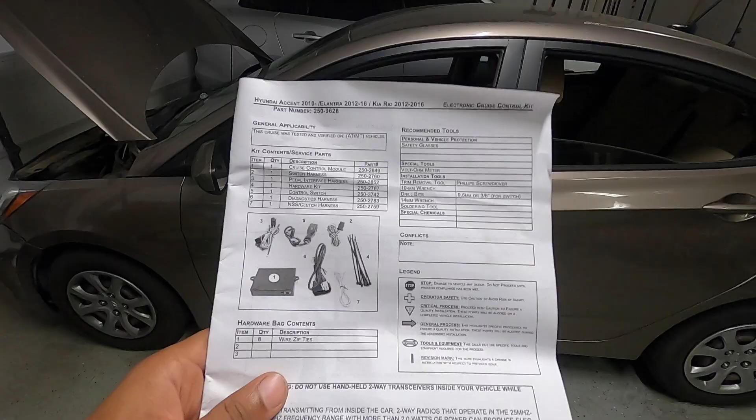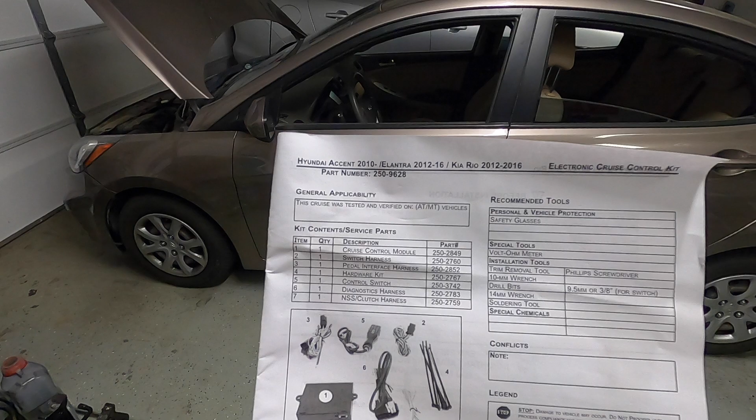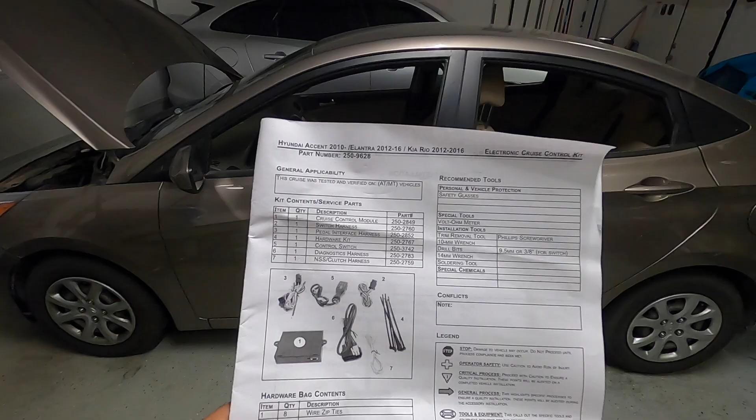So what we ended up picking up is the Rostra electronic cruise control kit. They have specific modules or kits for different vehicles that don't come with cruise control, and this is the one specifically for us. I'll put the link down below so you guys can see what it is and where I got it from, but you can pretty much get it from almost anywhere. The part number is 2509628, and that's for Hyundai Accents 2010 and newer, Hyundai Elantras from 2012 to 2016, and Kia Rios 2012 to 2016. So this is what we're going to be using today to get this thing going.

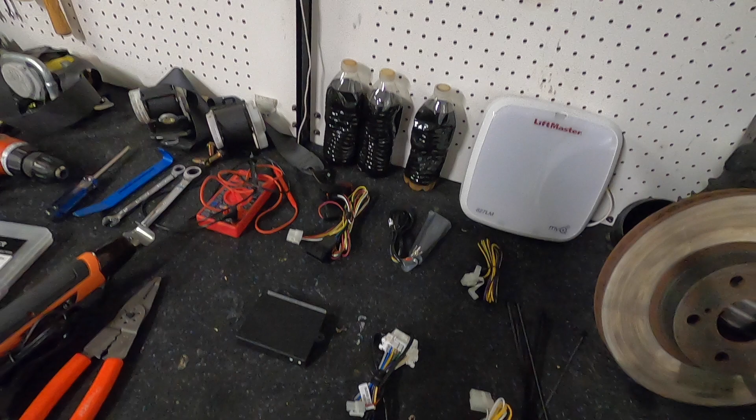First things first, guys, what you want to do before you get started is take out your kit, which is all this stuff here on the right side of the workbench, and make sure you have all the parts necessary to complete the install. You'd just hate to get the project going, midway through or almost all the way through, and find out you don't have everything you need. Ask me how I know, it's horrible.

We're going to go through this manual here today and just make sure we got everything. First, we need the cruise control module, which is this guy right here. Next up we have a switch harness, which is this one up here at the top, then followed by the pedal harness, which is this one at the far top left. Then we've got the control switch, which is right here in the middle, which is what you'll actually use to turn it off and on. Then there's the diagnostics harness, which is this guy here, and last but not least, the clutch harness, which is that one there, but we won't need that because we are automatic. In addition to the kit parts, it also has a list of recommended tools.

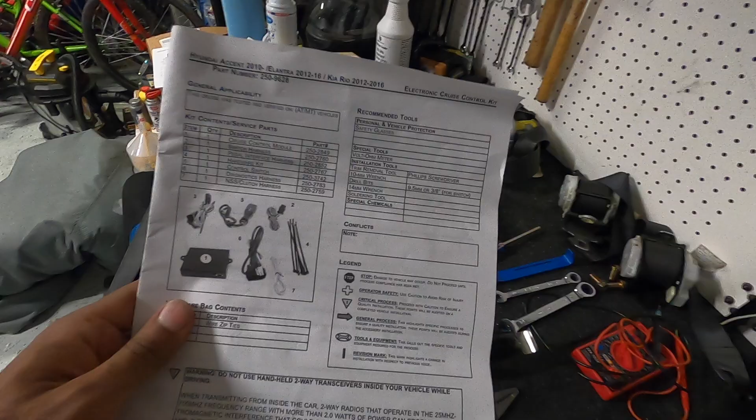I'll just run through that to give you an idea of what you'll be needing today. It recommends a voltmeter, or essentially a multimeter, a trim removal tool, which is right there, a 10mm wrench, a 14mm wrench, some drill bits, specifically a 3/8 or 9.5mm, and then some soldering tools. I decided not to actually solder this with conventional solder. What I have here is a little heat gun - I'll probably do another video on this, just a review of how it works, but it's amazing. This guy pairs hand in hand with these little solder splice connectors, which make it real simple to do actual wire soldering. You'll see this in a later video, or a sooner video, depending on what order I post.

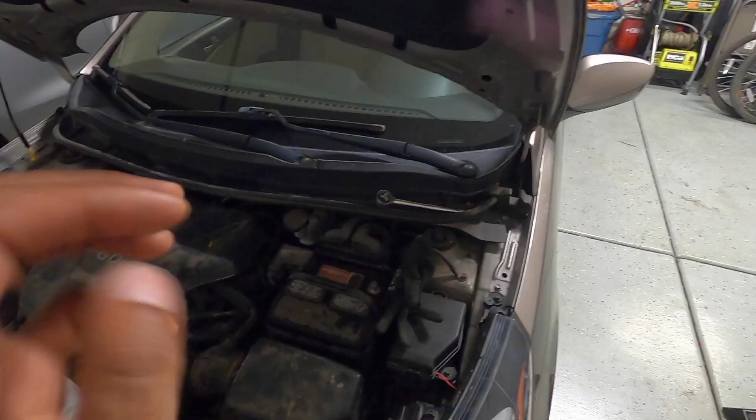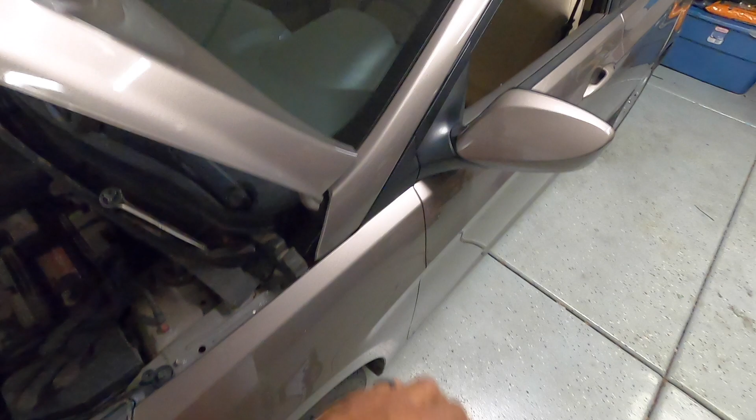First things first, with any project working with electronics, you want to make sure you disconnect the negative cable on the battery, which I've done already, and put it underneath this glove, because you don't want to pop any fuses or mess anything up while you're rewiring, soldering, and doing stuff like that. So make sure you do that.

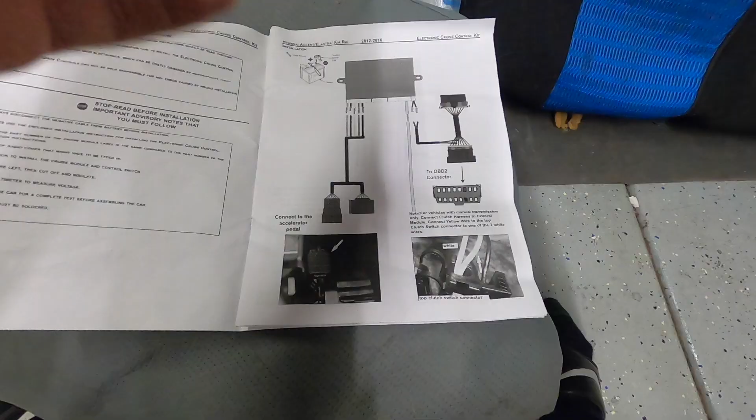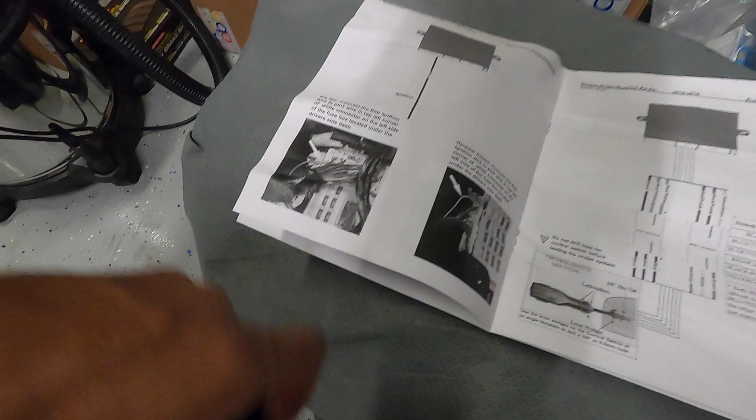Concerning the manual, one thing I want to point out, which they actually give a disclaimer about, is this is not a one-for-one step-by-step instruction. It's just kind of general instructions, because it doesn't tell you exactly what to do, it just shows you what is what and where to go. So you've got to kind of work through it like that. As you can see here, all the pages are just like a general diagram with a photo of what you should be looking at, and it gives you little notes here and there of what specific color wires you're going to be connecting to. But other than that, it doesn't tell you step by step.

So that's what this video is for, to hopefully help you guys if you're deciding to do this for your Hyundai Accent or another similar vehicle, giving some type of structure to this installation. I hope it does that for you, but without further ado, let's go ahead and get started.

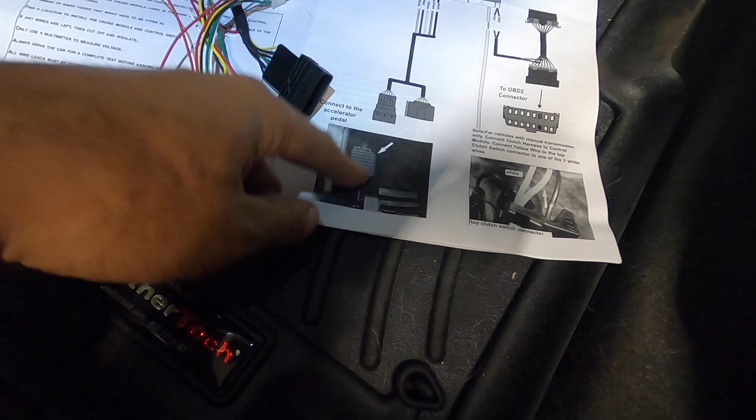First things first, per the manual, we're going to connect the pedal assembly connector. It should be plug and play. You'll simply unplug the connector from the accelerator pedal, and plug in this T-harness in between the two connections you just disassembled. Then the last thing you really need to do, on the next page, is one splice, which we'll get to in a second.

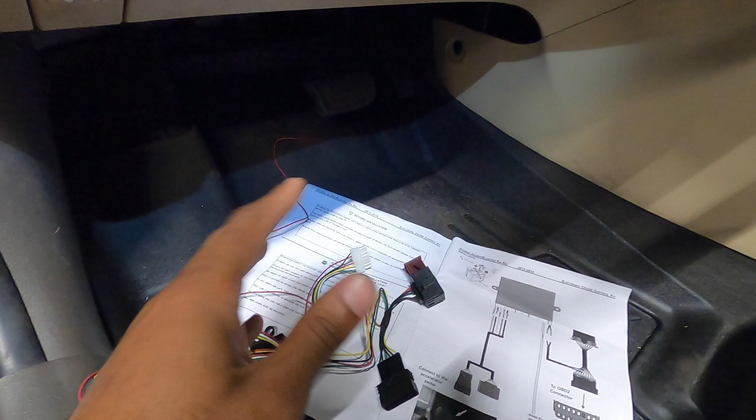I'm going to try my best to show you guys this underneath, but since we're working in such tight quarters, it may be a bit shaky, so I apologize. I'm also going to remove my external mic and use the internal GoPro mic so I can have some room to work with. So the audio may change from this point on, but it's just because I'm trying to get you guys the best view possible.

Alright guys, so we made our way underneath the front dash, and as you can see, here's the brake pedal, here's the accelerator pedal, and this red connector is the one we're actually going to be removing today and putting in this T connector here. So we'll go ahead and get started.

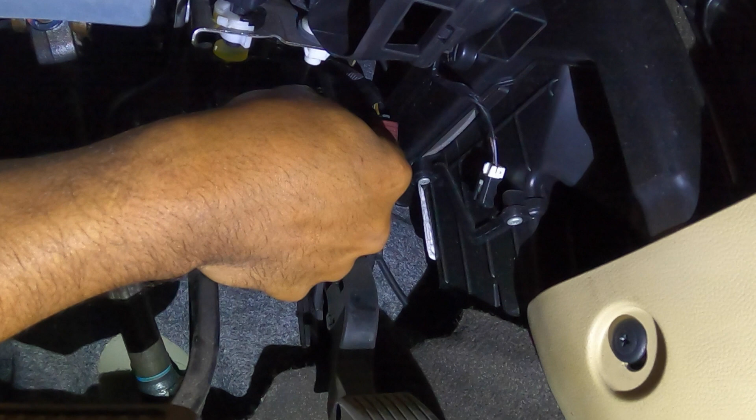In order to get this connection off, you got to pull out towards the back of the vehicle on this red connector, and that'll release the little lock on there. So just like that, that's released. Then you should be able to pull up on it. And boom, just like that.

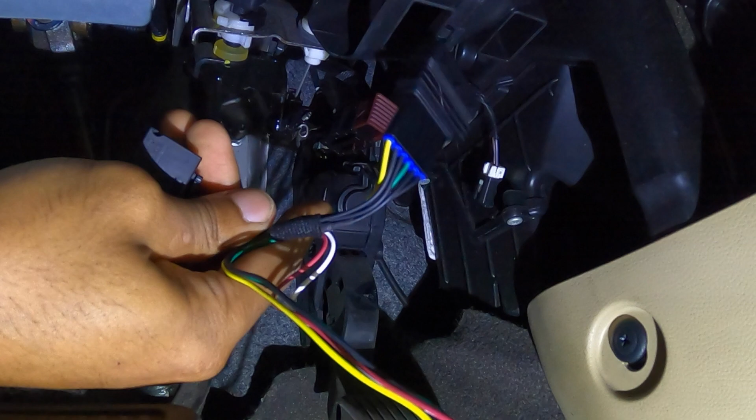There it is, removed. So now you'll go ahead and connect your T harness, and as you can see, you have one connector identical to that one, which is obviously going to go to the pedal itself, and the other side is going to go to that connector.

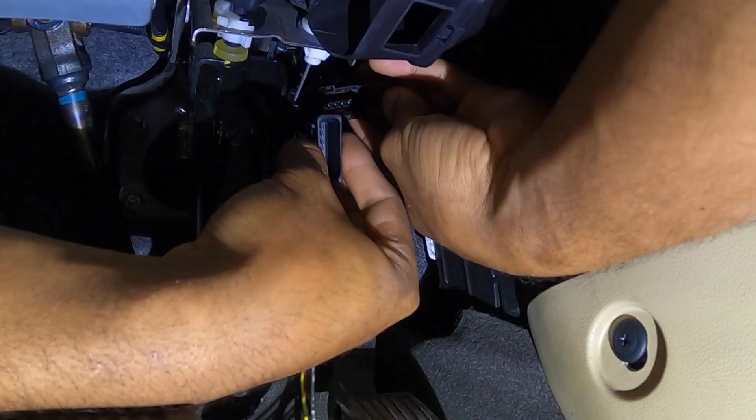There's the pedal side. Don't worry when you're installing this connector, there's not a wrong way you can put it, because it's key shaped and there's only one way it'll go in. So simply figure out which way that is, push it in, connect it, squeeze the red piece together, and there you go.

Now I'm going to get a little bit further up underneath here because I got to route these wires. The idea is to get these wires through the undercarriage here, and you want to come out to where the OBD2 port and the fuse panel are, which is over here off to the left of the camera. I'll show you what I did once I get it done.

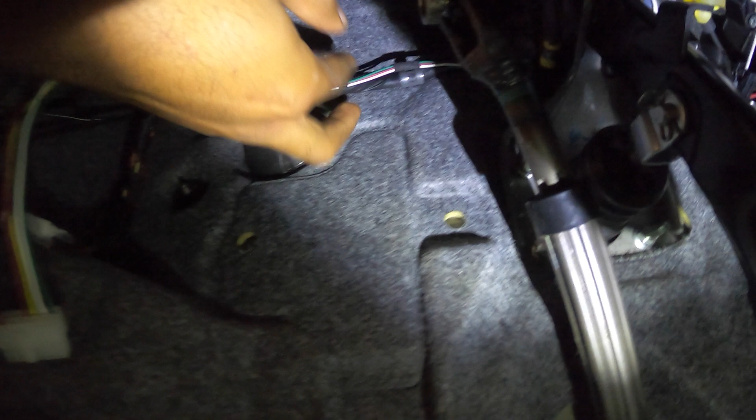Alright guys, hope you can see from here, but got those connectors connected as you saw. So I routed the wires up above this bracket here, this big silver bracket that holds the steering column, up and over and back over here. If you can see, there's an existing set of wires and some convoluted tubing. I just zip tied it along that same pathway to keep all the wires away from all the pedals and whatnot. Found the main harness that goes through the firewall, wrapped it around there a couple times.

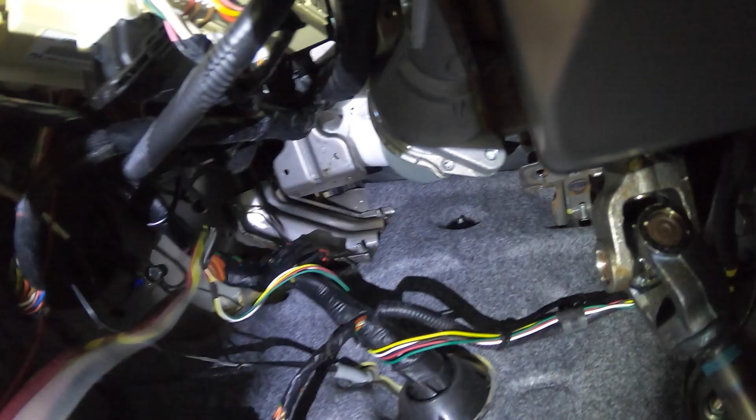I think I'm actually going to mount the box itself, hopefully you can see, up here. Let me see if I can get you a better angle. Yeah, right up there on that empty bracket. I think that's where the clutch would normally mount to, but I think I'm going to mount the brain, or the control module, to that. For now I left the connectors hanging, because once I get that installed, then I'll stick them up somewhere and zip tie them out of the way.

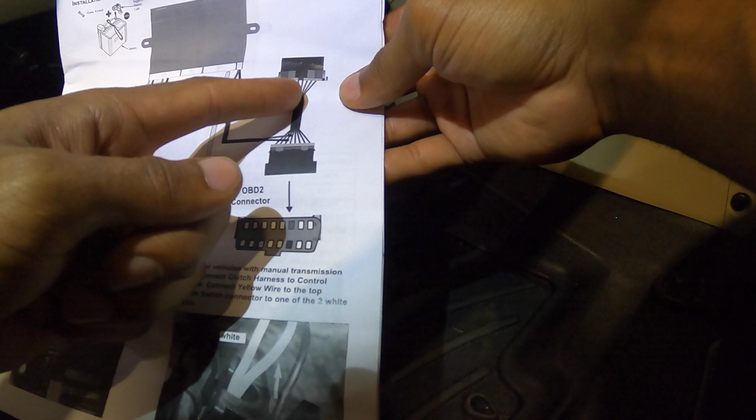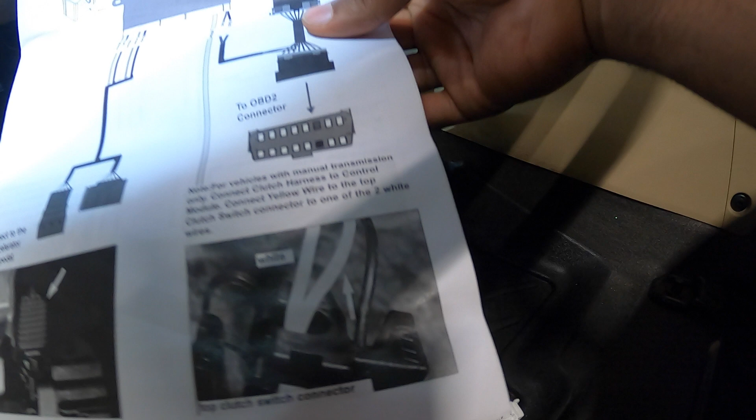So next up on the directions is the OBD2 connector, or the T-splice, as you can see here. Pretty much it's an entire harness, and you don't have to do any soldering at this point either. We're going to be connecting it up to the OBD2 port. There's actually some additional instructions if you have a manual vehicle - there's another harness over there which has a yellow cable, and you'll have to connect that in. But we're not manual, so we only need to worry about this guy.

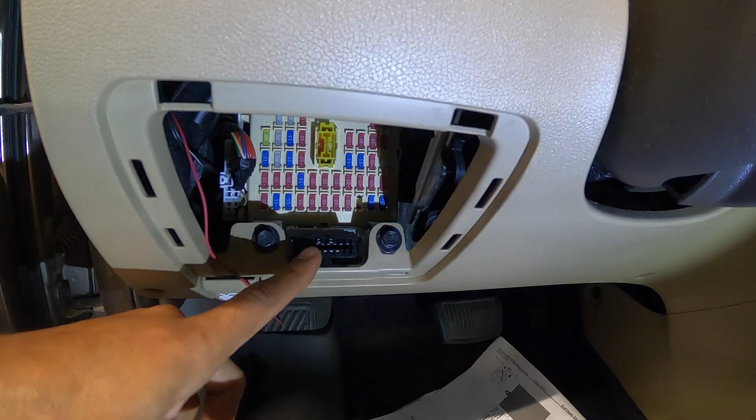Here's your OBD2 port. You pull off this little panel here and you have access to your fuse box. And simply what we're going to be doing is just pushing this out of its little hole.

You'll connect this female side to that guy, and then you'll have a new male side which will come through. This already has a pre-spliced set of wires which will go to your control module. So once again, real simple.

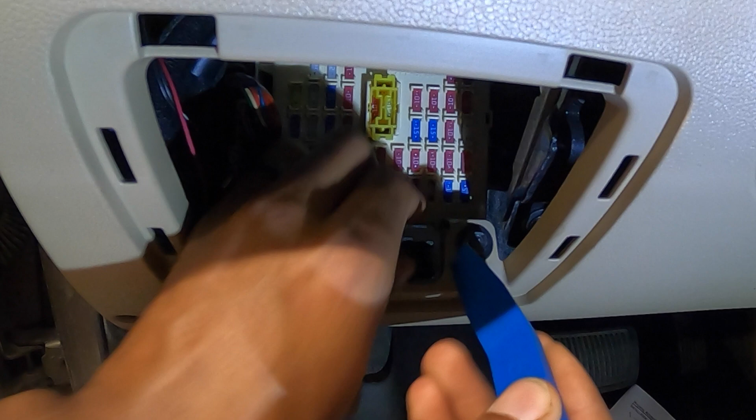If you can't really see, on each side of this OBD2 port there's a little lip or notch, and you have to push these two notches inward and it should fall out the back side. So we'll do that now. There's one, and there's two. Now, as you can see, I just pull it out the back, and there's your connector.

So now simply just connect the female side like I said. These are keyed, so there's only one way it'll go. Connect the female to the existing male from the vehicle, and make sure it's nice and secure.

What I'm going to do, guys, this doesn't actually have to be done. Since this guy doesn't have a locking connector on that part, you can kind of just wiggle it free like that. I'm going to go ahead and put a zip tie around the center of the connector, just holding it together and making sure I don't have to worry about this coming apart while driving, because we are dealing with cruise control, which is your gas and your brake, and those are extremely important things for safety on the road. So as an added layer of security, you can zip tie this through the center, get it through both connectors, and cinch it down. There you go, it'll just hold it there.

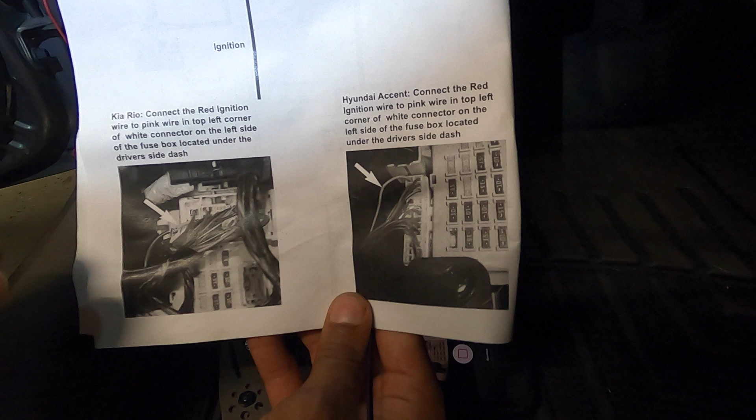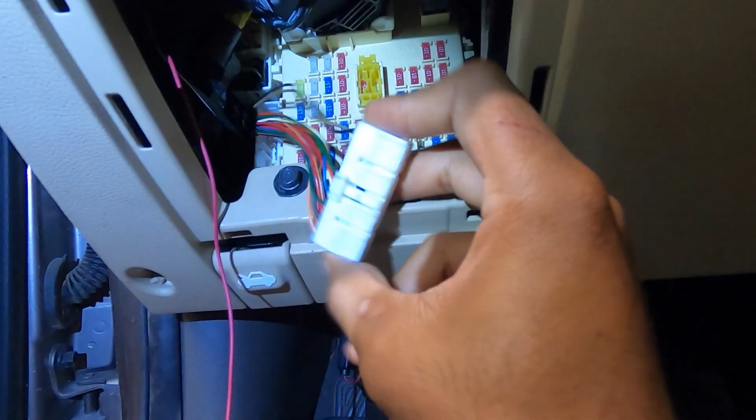Next up, it has the red ignition wire that we are going to have to do some splicing on. This is the same ignition wire that came from the pedal harness. On this one there's actually a pink wire. It kind of looks salmon. To give myself more room to work with, I went ahead and disconnected it and unraveled that electric tape, and the wire is pretty pink — I think it's just discoloration from age. Connector, remember, connects like that. So this pink wire here is the one we're going to be splicing into. Let's go ahead and do that.

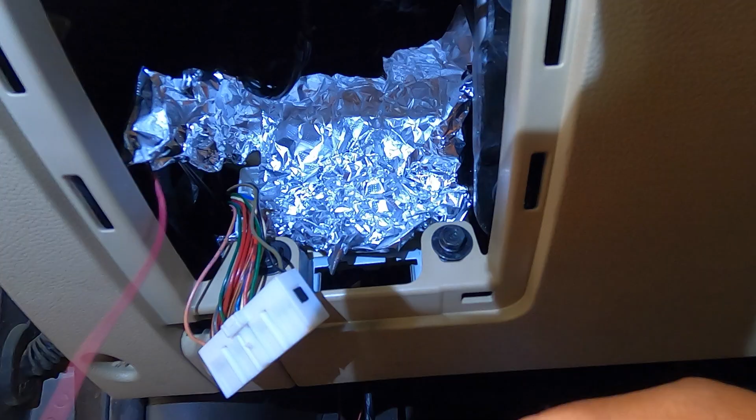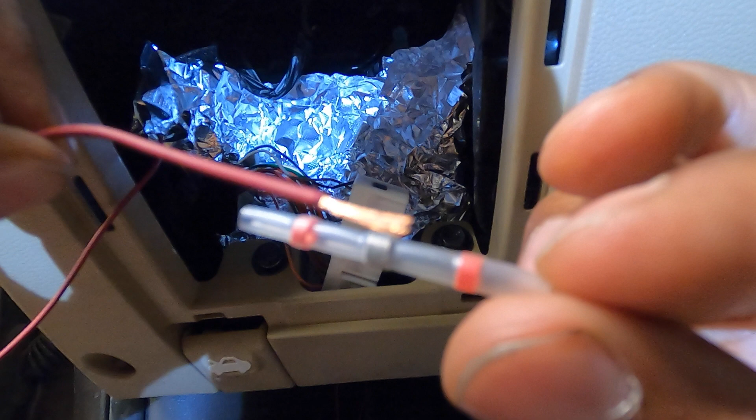So how these solder splices work, guys, is you cut off the ends or remove the insulation on both ends of the wire. Since this guy's already connected, I'm just going to cut it a ways up in half and do the same as I did here. I'll tie these two together on one side and leave the other side blank, and slide this all the way into the center, where this will sit right over that middle solder, as well as the other side. Once you heat this up using only a heat gun, that solder in the middle will melt and solder these wires together. In addition, the remaining heat shrink, which is a specific adhesive, will seal off this connector and make it waterproof and a really durable connection.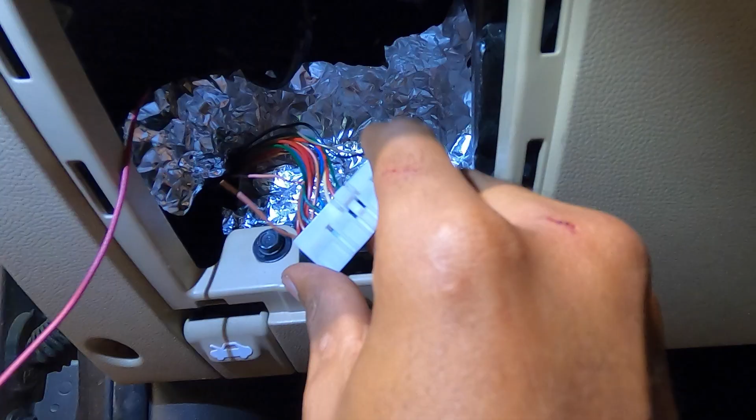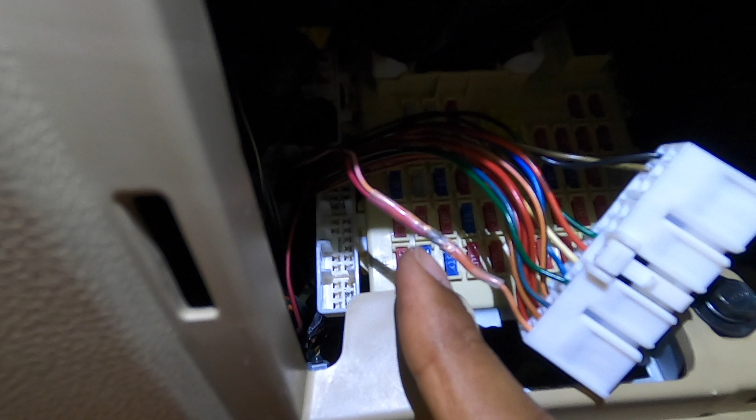And there you go, guys. Now you can see I went ahead and cut the wire and removed the insulation so we have new clean wires on each side, as well as with our ignition wire. So I'm going to tie these two together on this side, and then this one will stand alone by itself, and we'll connect the solder splice over the top of all three of them. Hopefully you guys can see, but I went ahead and put that solder splice underneath and used the heat gun. As you can see, the middle portion, which is the solder, melts and connects all three wires with a nice strong solder bond. The outside of the connector itself is just a heat shrink material that also insulates and waterproofs, so that shrank down and sealed that off as well. So we're good to go there, and we'll move on from here.

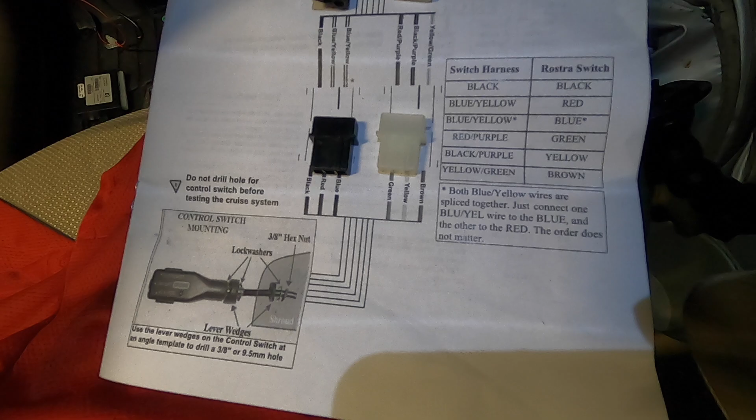It's time to make our connections for the control switch mounting, which is this guy right here, which is what you'll be mounting to the side of your steering column. But it gives you another graphic here — this is the harness up top that comes from the brain, and it already has these connectors made. As you can see here, it says yellow, black and purple, red and purple, so there you go — yellow, black and purple, red and purple, so on and so forth.

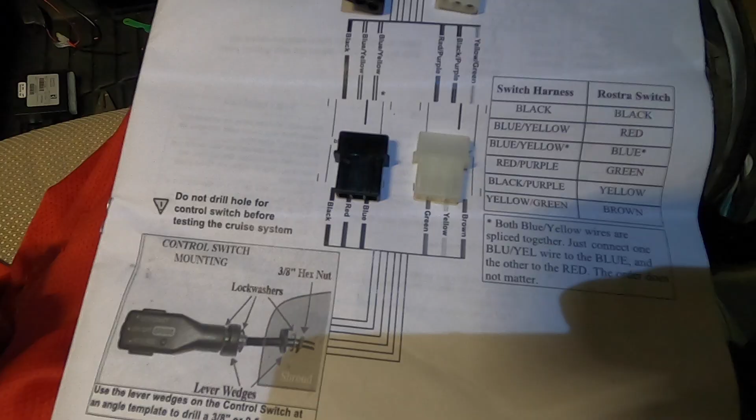For the wires that come from the actual control switch, they don't have a connector quite yet, but there's the black and white connector that it comes with. This gives you the diagram of where you're going to be mounting which wire to which wire.

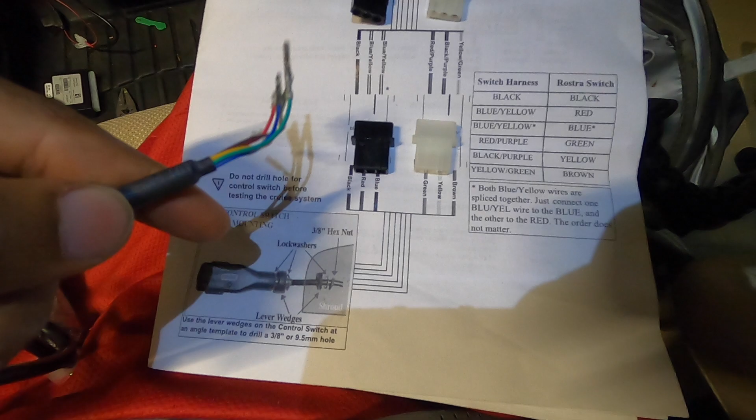Here's the weird part: you don't want to actually stick these into the connections right now, because you still have to drill that hole in the steering column to route this through and connect it up later. If you put these connectors on, you won't be able to fit through the proper hole size, and it won't mount securely and sturdy.

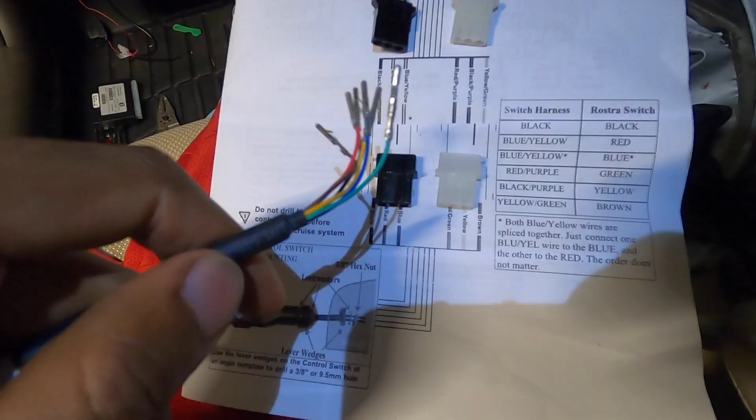So we're going to connect them over here without the connectors, connect them all to the brain box down there on the floor, and actually take it for a test drive before we do the final connections. That's what it recommends doing.

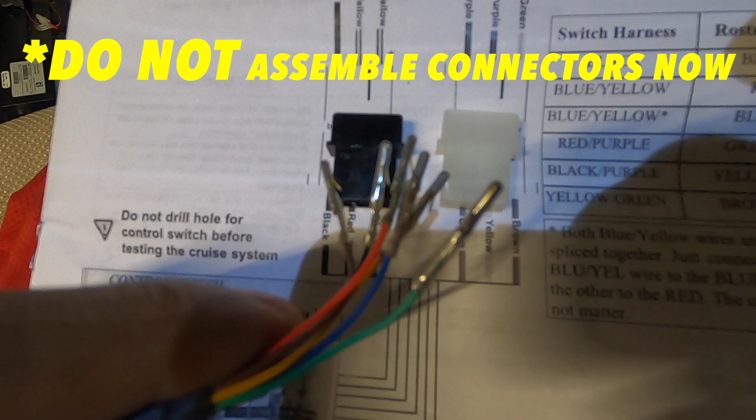So yeah, to reiterate, don't put them into the connectors quite yet, because you still don't have this through the steering column. You won't be able to fit through with these, and you'll screw up the hole size, and you'll probably have multiple holes, which you don't want.

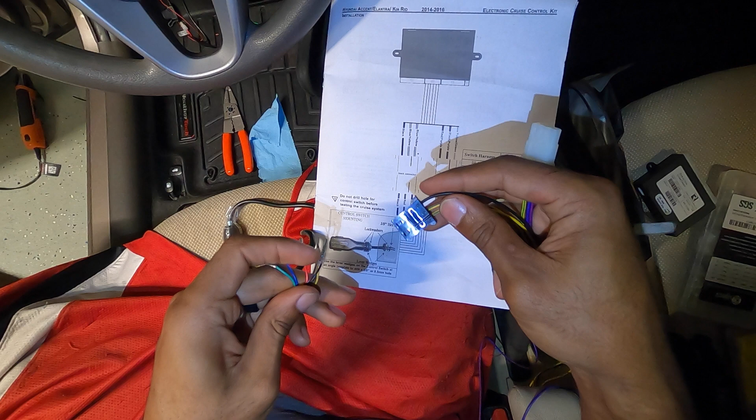We'll go ahead and just temporarily connect these guys. I'll start with the black connector, which is the one over here. It says the black cable goes to the black cable from the control switch, so we'll push that in there temporarily.

The blue and yellow goes to the red, so we'll grab the red and put that in there. Then the other blue and yellow goes to the blue wire.

Then we take the other one, the white connector over here. They say the red and purple wire, the one on the far left, goes to the green. The middle black and purple wire goes to the yellow. And last but not least, the yellow and green wire on the far right goes to the brown. So as you can see, I don't have the connectors on there, I simply have them connected freely because you want to test it out.

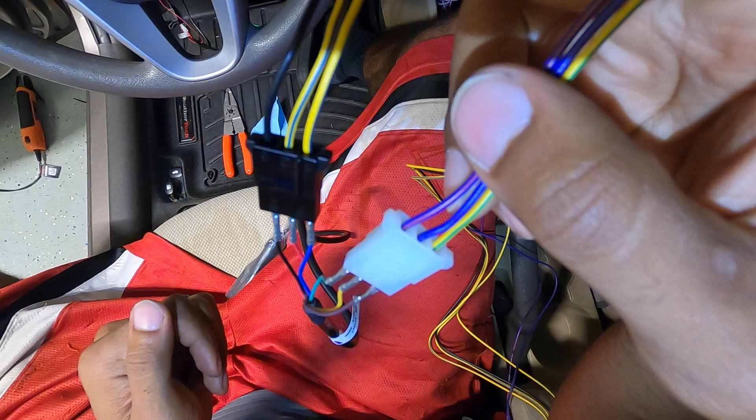So we're almost getting to the point of testing it out, but we'll move on to one more step before that. Now that we got all those connections made temporarily, it's time to do the testing.

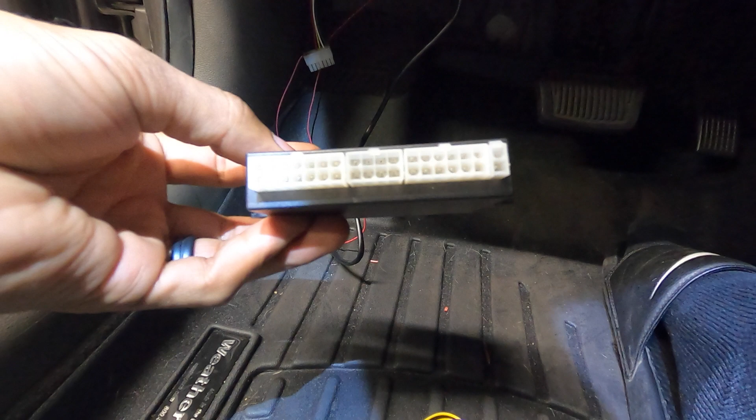We're going to start connecting up all the different connectors, starting with this one here. This one's going to go all the way to the far left connection there. That'll click right in. Then next we'll have the other one that came from the control switch, going right there in the middle.

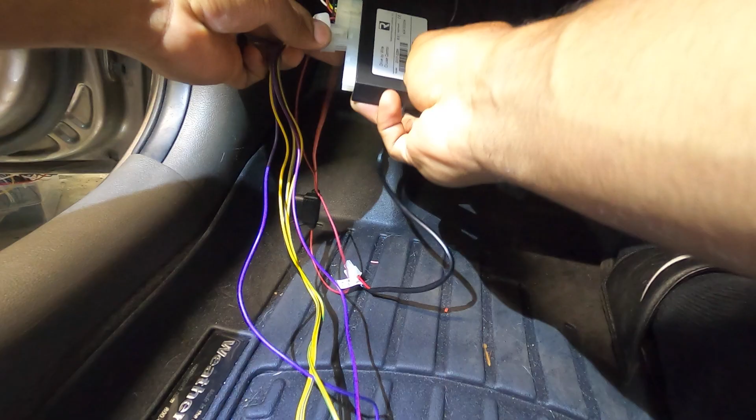Last but not least, the other one coming from the pedal switch goes all the way over here, to the far right connector. You're going to have a missing connector here, which is not really missing — that's where the clutch wires would normally go, the other piece that came with this kit. Since this is an automatic, we don't have to worry about that.

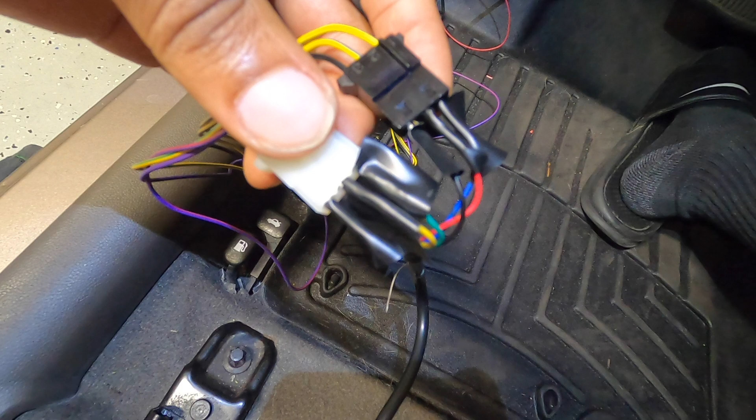What I did real quick before we go test it out is put some electric tape over those exposed wires. I didn't want them touching while we're out there testing the system, so I'd recommend doing that before you plug back in your battery. Other than that, we got all the connections made and just sitting out on the floor for now.

I think it's time to actually go test this guy out. So I went ahead and connected the battery, got back in the car. Without further ado, let's get going.

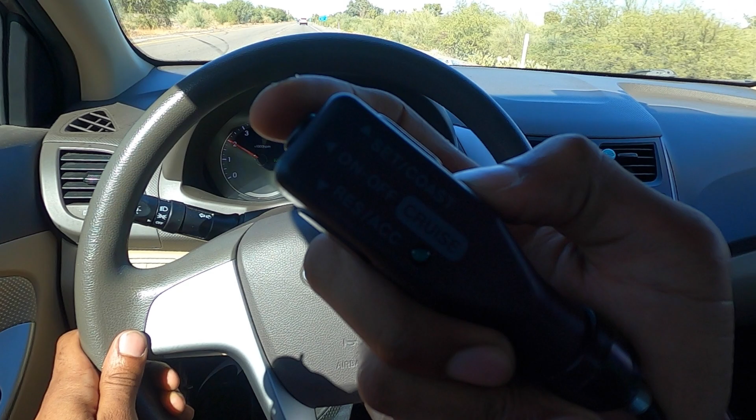Okay, so we're on the highway now, and we got the cruise control module here in my hand. First things first, let's see if it turns on. There's a little green light, kind of hard to see, but I'll try to show you in the light here.

So on the top side is your set button. In the middle is the button I clicked on the side, which is your on-off button. And on the bottom is your acceleration and resume button. So essentially, if this works, right now I'm going about 65 — hopefully you can see the speedometer. But if this works, I should be able to hit this button and take my foot off the pedal.

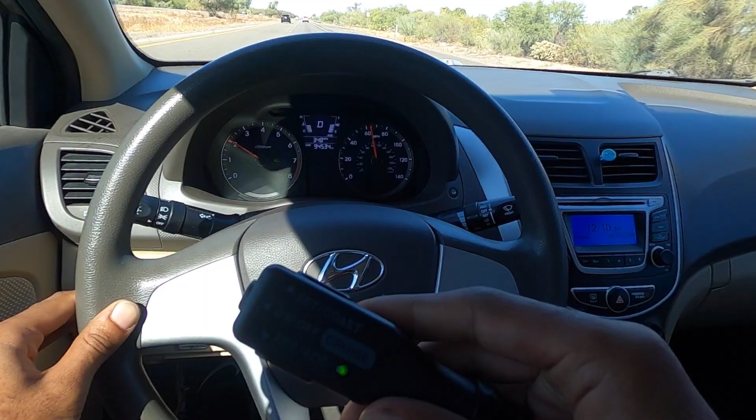So I took my foot off the pedal. Heck yeah, we are cruising, guys. We are officially cruising, can't see my feet. Tried to lift it up right there, but no feet on the pedals, and we are cruising.

If I tap this button on the bottom, which is accelerate, I should be able to speed up, so I'm going to go ahead and do that. Oh, we're accelerating. This is freaking awesome.

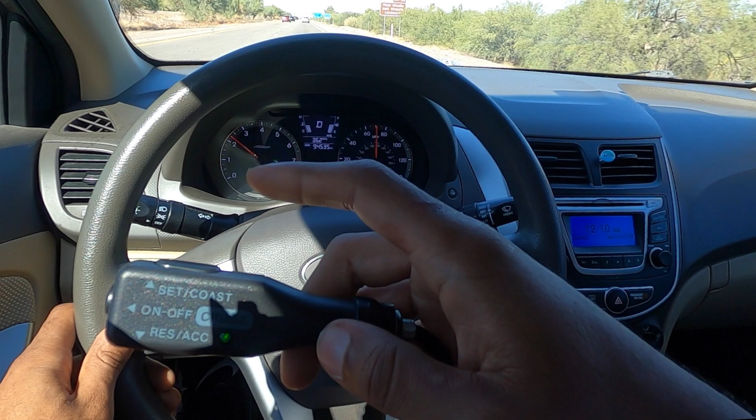We're about at 72 now, and yeah, still haven't had to touch the pedals whatsoever. Wow, this is awesome. I'm not saying I doubted myself, but I just didn't know, to be honest. So we've got to test all the features on this guy. As we know now, it works to cruise, and it works to accelerate. So next up, let's go ahead and see if we can coast.

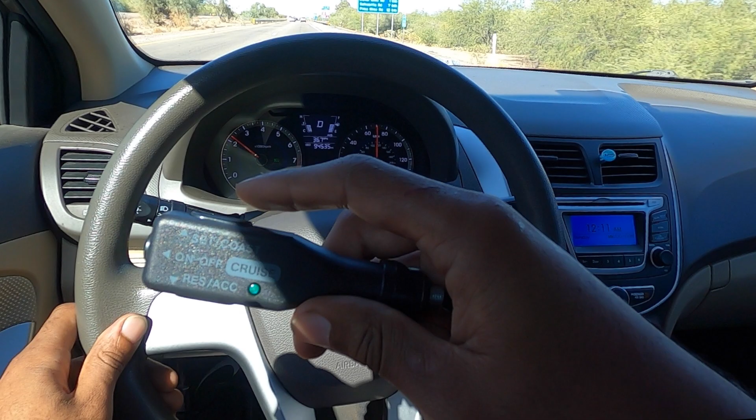If I hold this button up top, I should be able to slow down. Yep, sure enough, starting to slow down. Now at about 68. Now if I press the brake, it should turn it off. So press the brake. Yep, slowing down. Okay, now if I click this bottom button, it should resume to 68. It's working, it's accelerating right now back to 68 miles an hour. So yeah, that's working too.

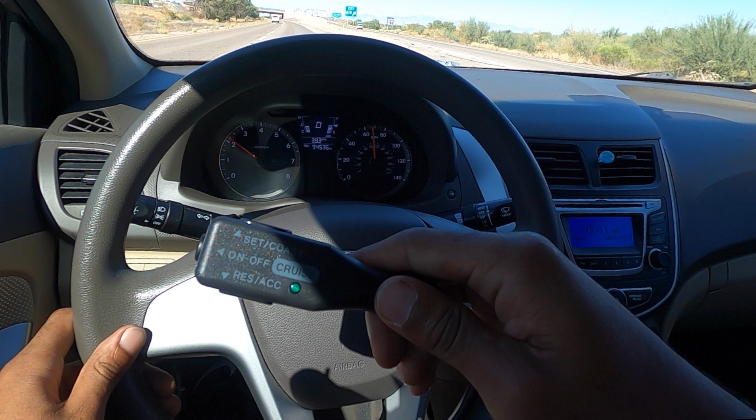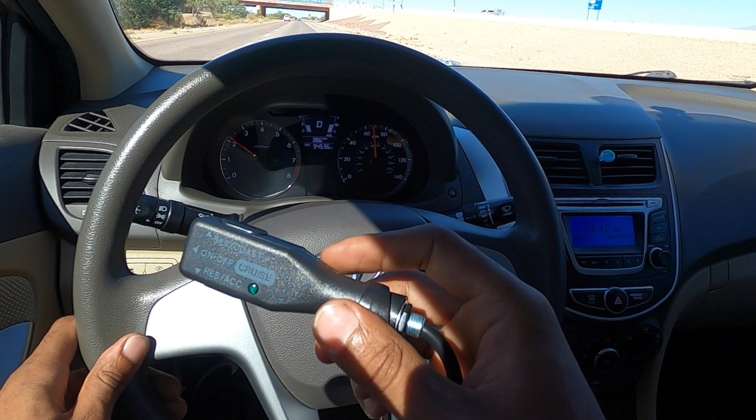I didn't think this was gonna work, guys, I'm sorry. It was just something that looked too good to be true online. I knew I was gonna be able to install it without any issues, but having it work flawlessly like this is crazy. Now that we've proved this thing works, I'm just gonna keep cruising on home. So yeah, it works, guys, it works. And just like that, we are back. I'm freaking excited right now because I honestly didn't think it was gonna work. Not to say I didn't think I couldn't do it, but I just didn't know. It was too good to be true.

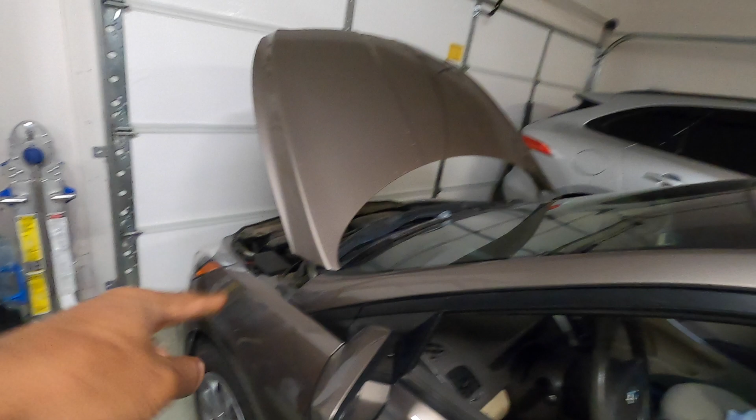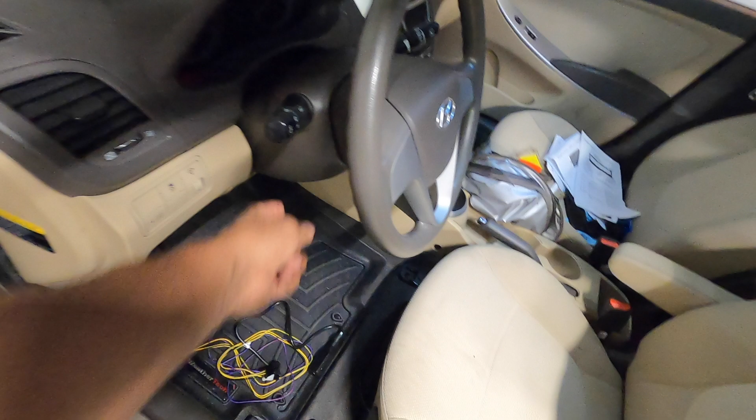Now that we're done, we know it worked. Now we've just got to move on to the next part, which is finalizing the installation. So again, pop your hood, remove the negative cable on the battery, which I haven't done quite yet, but I will. We're gonna have to tuck up all these wires nicely up underneath there, and then we're going to be taking this guy off to get ready to mount the actual controls to where it's going to be for its final resting place.

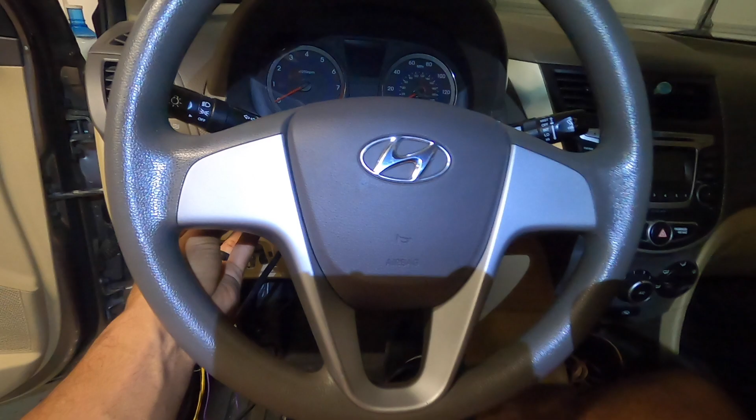Before you fully remove that shroud on the back of the steering wheel, do one thing first: take your little control switch and mock it up to get an idea of where you want it. Being that I'm a little bit taller, it's kind of hard to see up underneath this portion of the steering wheel. My wife drives this vehicle more than I do, so I'm trying to figure out where I would want to put it. I don't want it too far down where it'll interfere with my knee or her knee if she's driving.

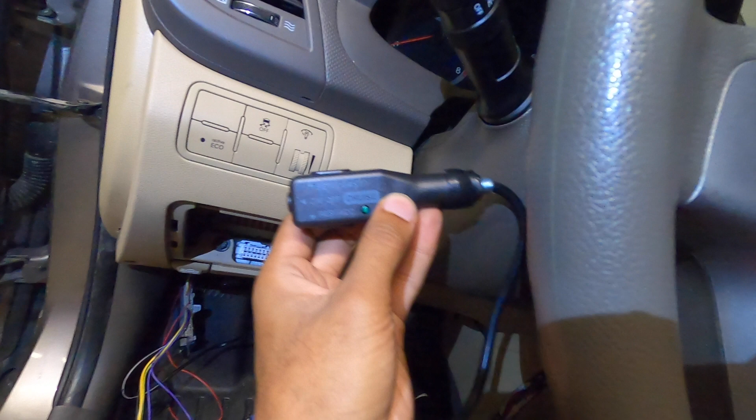But then again, I don't want it too far up where it'll interfere with this guy up here. So just try to find that happy spot where you'd like to put this guy, and not only do you want to know which way up and down you want to go, but also how much you want it to tilt forward and back, because this shroud is not perfectly straight, so where you drill your hole will determine both up-down and left-right position.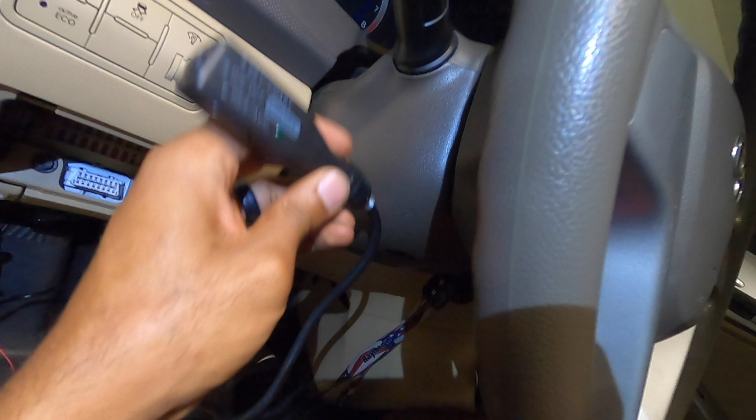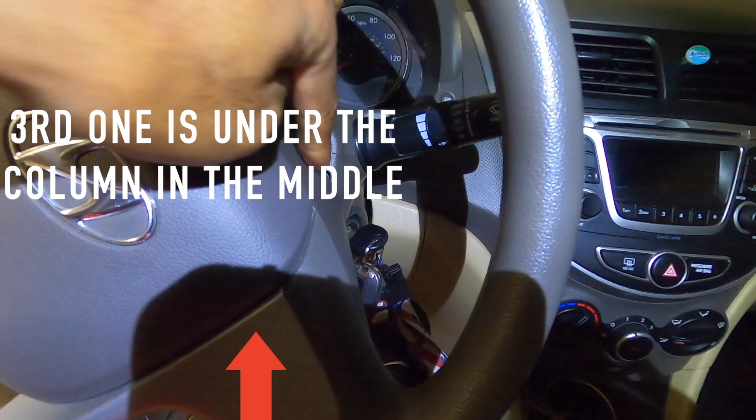Alright, so now with the battery disconnected here, we're getting ready to move on to the next part, and this is where your two screws are. I've already removed them, but there's one there, and one back over there. So simply to remove that shroud, as you can see, I already got it separated. Just use that plastic pry bar that you guys have, and you'll just kind of wiggle it in between the two pieces.

I found it easiest to go right underneath the blinker, gave me the most room to actually fidget the pry bar in there. Then you'll just pull down on it, one side will pop down. You repeat that same process on the other side, and then simply kind of finagle it through, pulling it forward and down at the same time, getting it around all the different pieces.

You have the little handle at the bottom, so make sure you get that handle through. Just work it little by little, take your time, and you'll get it out just like that.

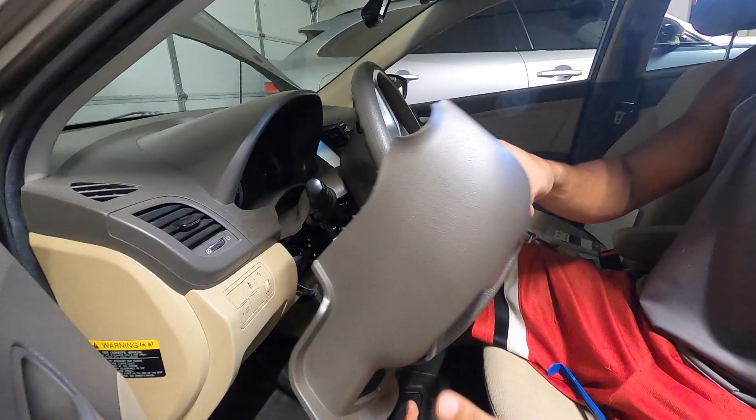Now with this removed, you're going to start getting the location ready to drill the hole. I marked my spot with the drill bit itself, just made a little scratch mark, and that's where I'm actually going to be drilling. Alright, so there's my hole, my 3/8 hole or 9.5 millimeter hole.

You're going to go ahead and grab the diagram itself. There'll be a page that'll show you specifically the order. There's a couple of washers and lock washers as well as nuts, and it'll tell you the orientation to put them in.

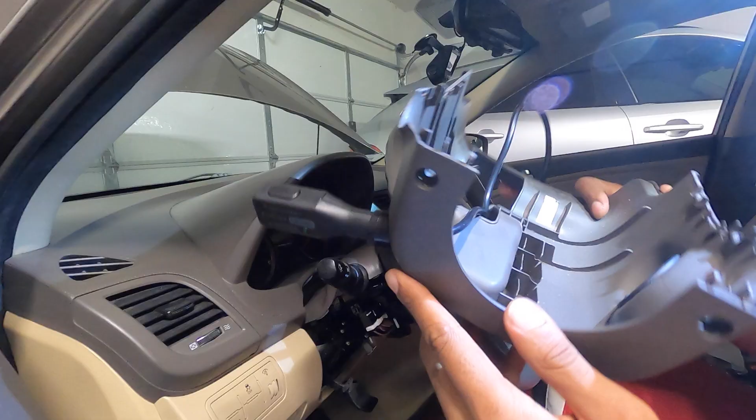Alright guys, so I got my switch installed, as you can see here, and this is where you'll use that 14 millimeter wrench to tighten the nut on the back side down. Be careful, do not over tighten it, because it's literally just gonna crack your shroud itself, and you don't want that to happen.

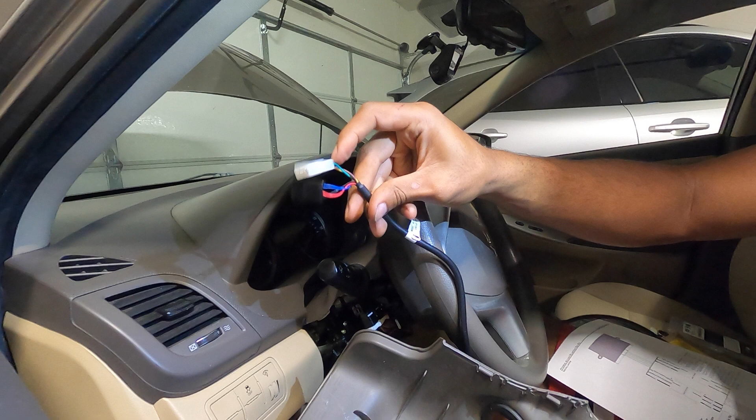Now that you got your switch through the shroud, you can go ahead and connect the little connectors to those wires which are free, the ones we temporarily mounted earlier to do the test run. You'll just push them in the back all the way until you hear a little click, and that secures them into place. So that's snug, that's not going anywhere.

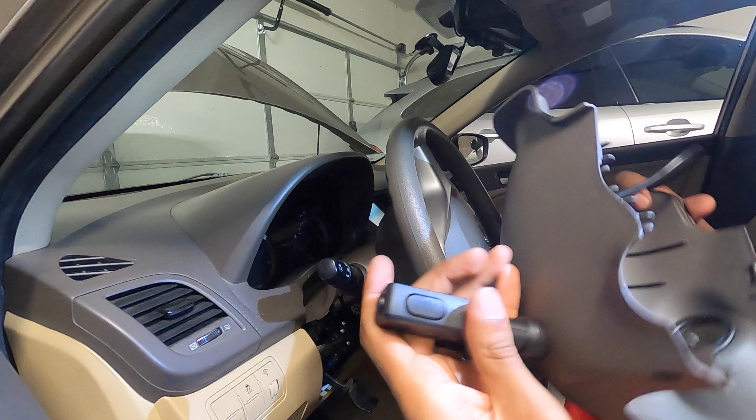So now we're gonna have to put this back on and route the rest of the wiring back down to the bottom. Alright guys, hopefully you can see we got this installed and all the wires up and out of the way. If you can see this wire coming up across the way, that's the pedal wire.

Here's the OBD2 wire, or the harness that comes from there. There's a lot of excess wires, as you can see here, but I just had to route them back and forth, and then zip tie each wire bundle together. There's actually a harness right back here behind the fuse panel that goes straight up, so I just zip tied those multiple wire bundles to that to keep them all up and out of the way.

Here's the brain box, or the control module. I mounted that directly to the harness coming through the firewall. I wasn't able to mount it to that one metal point up there because I would have to drill holes in the metal, and I don't have a drill to get up into this small spot. That's good to go, and we don't have to worry about it interfering with the pedals.

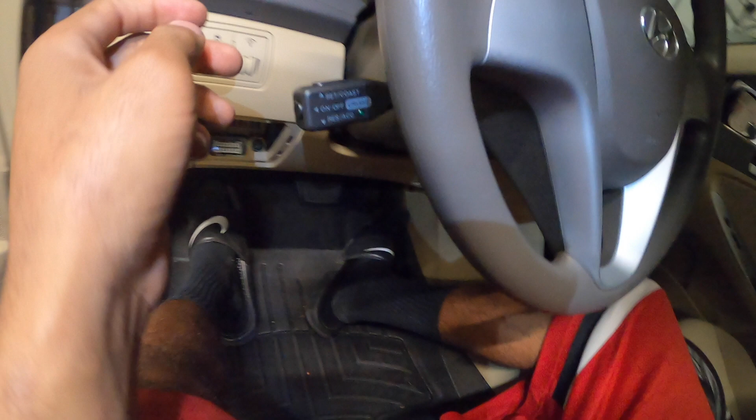And back up top, like you saw earlier, we got the control switch mounted up. It's nice and firm. This control switch doesn't do like some of the other ones where the whole switch will move up and down. It's literally just the buttons: on, off, accelerate, decelerate, and so on and so forth.

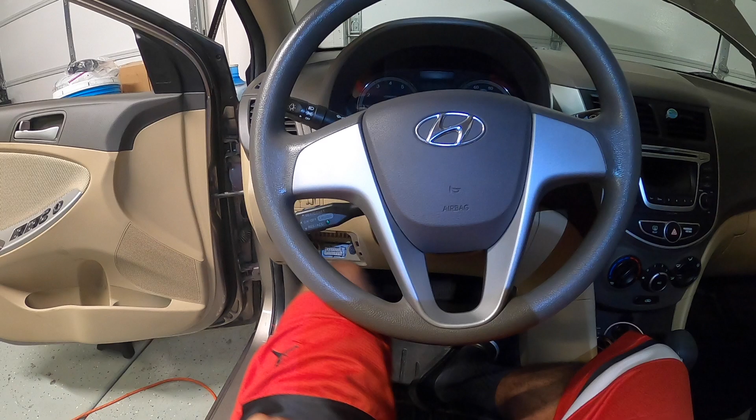I managed to find a perfect position for it, as if I'm driving right now. Sometimes I drive with my knee, so I can lift my knee up, touch the steering wheel, not anywhere near the cruise control switch. And as you can see, I can see the controls, I can see the light, I can see everything I need to touch from here. It's going to be even better for my wife, she's a little bit shorter, so she'll have a better view of all that stuff. And she won't have as long legs as I do, so she doesn't have to worry about her knees interfering with that either.

With that, guys, I think we're actually done. And with that, ladies and gentlemen, we are done with today's video. We are done installing the cruise control module on this 2014 Hyundai Accent.